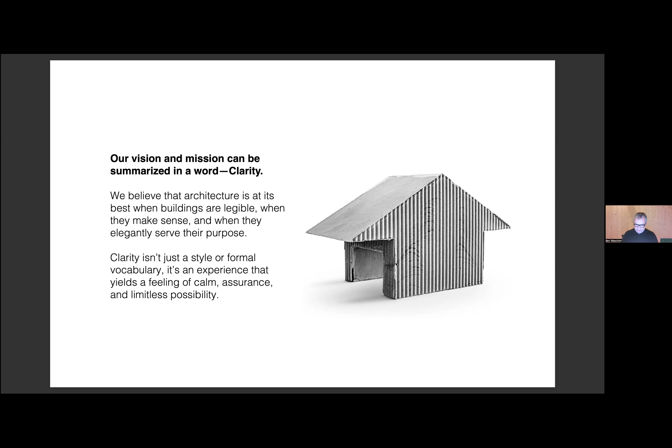And I think one way we like to describe it is an idea of clarity. And what we mean by clarity is it's essentially experiential legibility. And that legibility starts as a formal legibility, but then it's also compositional legibility, material palette legibility, systems legibility, and so on. I oftentimes start with these images, and I like these images because, to me at least, they represent formal legibility, and I like them also because it demonstrates how formal legibility can occur in all types of places.

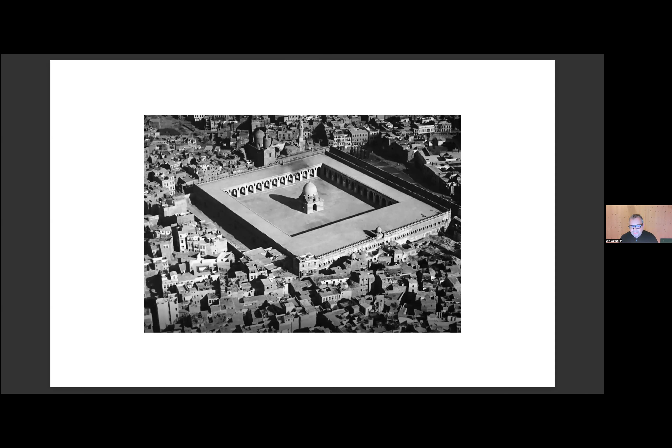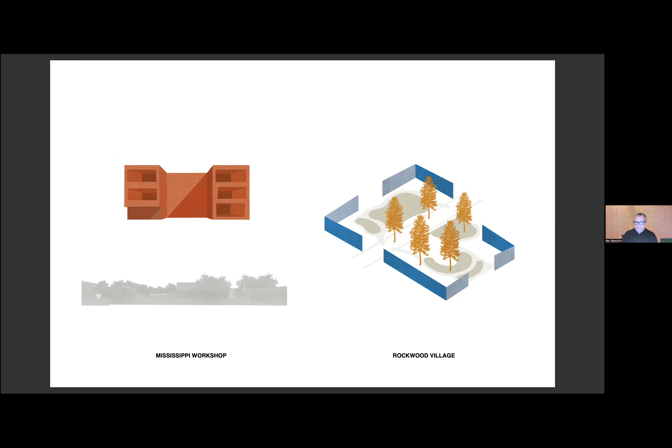And then with Rockwood Village, it follows this diagram where we're using the buildings themselves as really a secondary element within the project and treating the buildings as an edge to the park. So really giving priority to the park and the buildings as a quiet backdrop to the park.

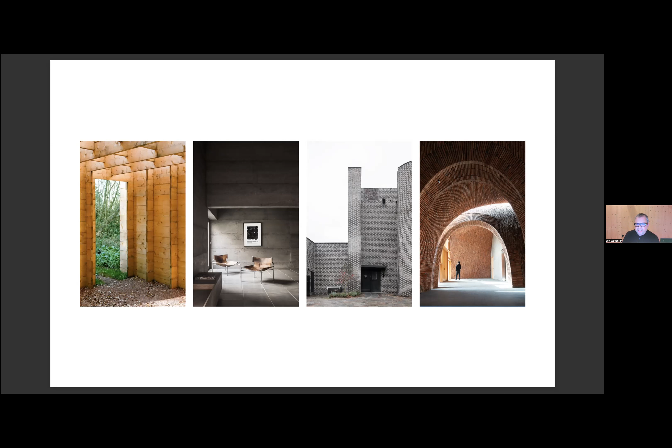So the Mississippi Workshop, as I mentioned, the idea actually didn't start with all mass timber. It was really an idea of trying to choose a material that we could use, if not in whole, a building that could be made primarily out of one material. And so, you know, it could have been brick, it could have been concrete, but because of where we are, because of the time in our world, and because of all of the new work that's been done around mass timber, we really leaned into using mass timber as this idea for one material.

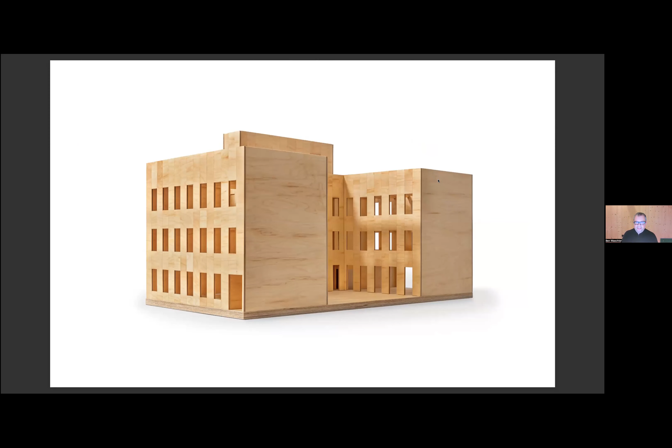This was a model we built before construction, after designing it, to really frame the project. And so this starts to show the components of the building. It's a 3-story building. It's a courtyard building, and the mass timber walls are constructed as a tilt up. So the walls go foundation to roof, about 45 feet, with beams, as you can see here in the model, second, and then floors third.

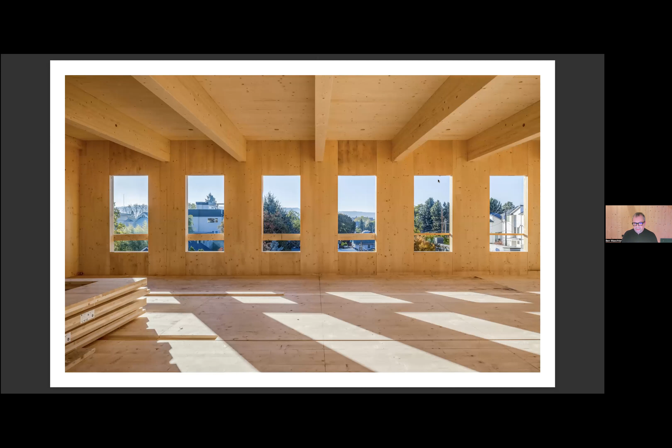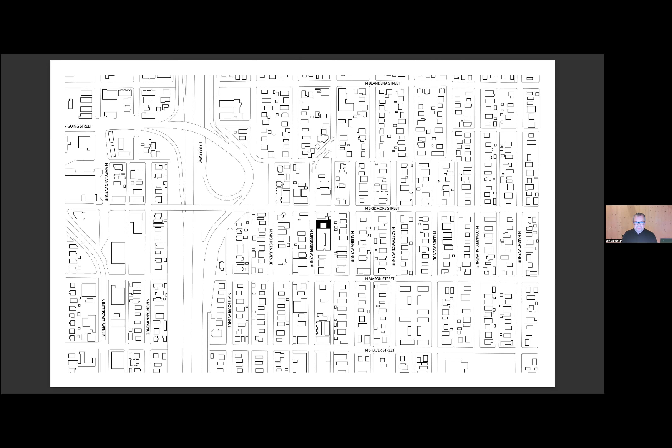Context: we call it the Mississippi Workshop because we're on Mississippi Avenue, which probably most of you know. We're at the north end, so Skidmore and Mississippi. It's a 50 by 100 lot. The architectural history of Mississippi Avenue is really made up of streetcar era buildings, whether wood or brick, buildings that oftentimes had retail on the ground floor and residential above, strong grid composition of the facades. Buildings were smaller scale, so 25 feet wide to 50 feet wide.

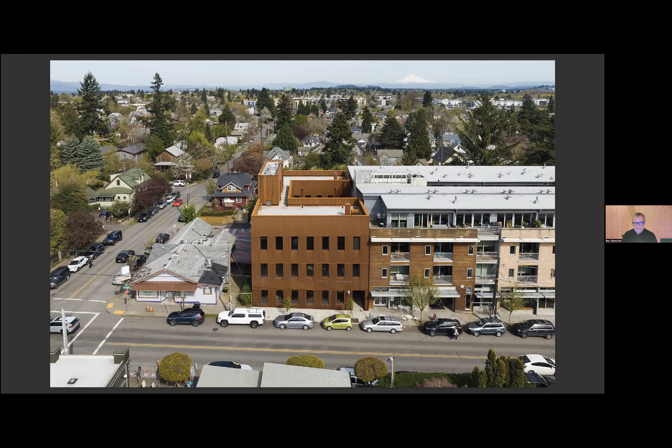Organization. Organization was sort of a counterpoint to this idea of building all out of mass timber, or all out of one material. Organization was really important in this building as a way of future-proofing it. Building all out of mass timber was great for creating constructional legibility and a strong sense of character and identity for the building and the interior rooms, but it's not easy to change over time. So we developed a strategy. We call it 6 rooms: 3 on the west side, 3 rooms on the east side, with a connecting courtyard in the middle. And the courtyard's really the first room, or the 7th room.

The idea with this strategy is that each of these rooms, they're larger rooms, about 30 feet wide by 50 feet long, are in some ways generic loft spaces, but they've all been outfitted with plumbing, mechanical and electrical to become either an office space, an apartment space, or on the ground floor, a commercial space. This is a conceptual diagram, the blue being residential, the orange being office, and the red being commercial.

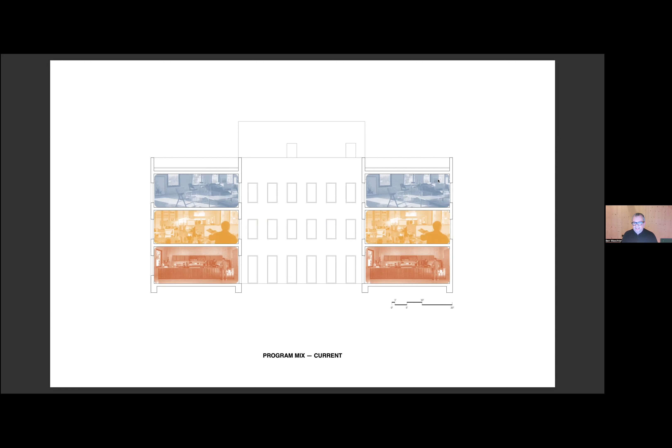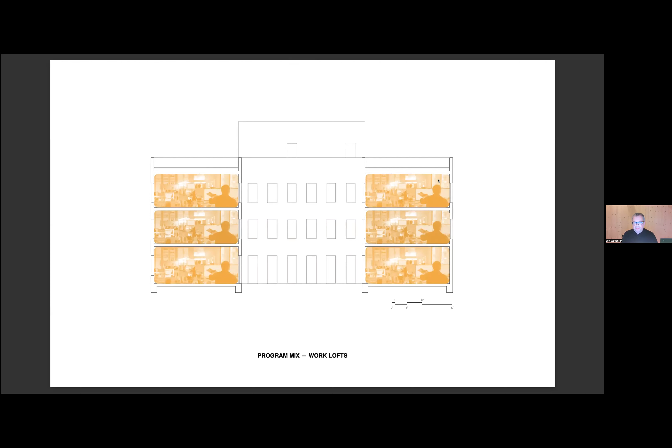This is the current organization of the building. I have an apartment on the 3rd floor, so residential. Our studio is on the 2nd floor, and then there's Capitola Coffee, a coffee shop, on the ground floor of the west side, and then we have our event space and model making shop on the east side of the courtyard. And this shows how it could be changed if needed over time, with minimal effort: all office, or all apartment and coffee shop, or all office on the west side and all apartments on the east side.

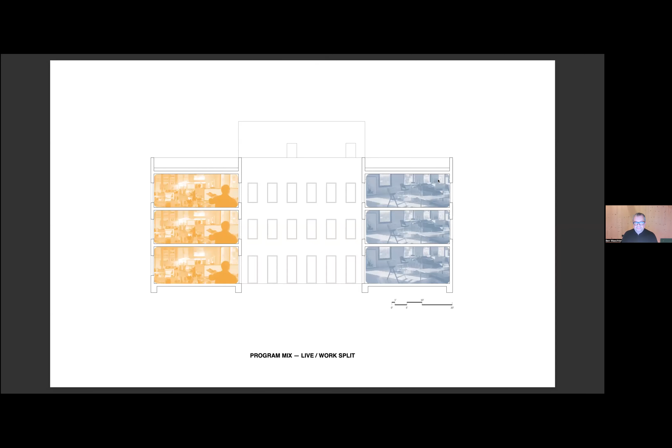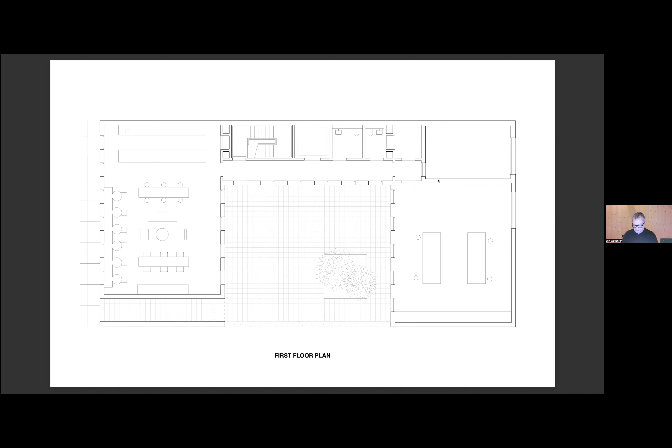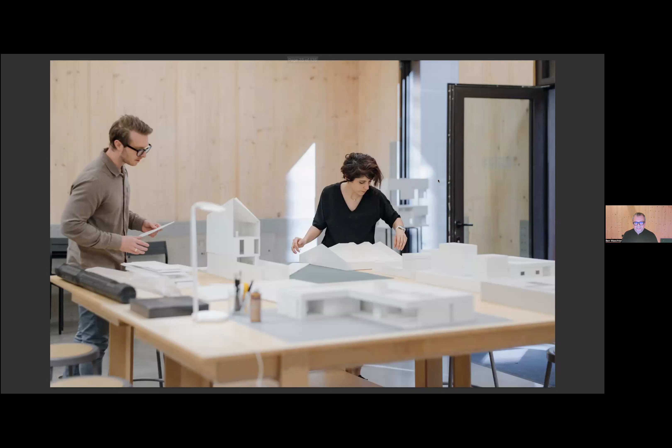Some more images of the courtyard with our model shop and workshop in the beyond. Model shop. And then this is the 2nd floor, our office space. On the east side, the right side, is our desks, and on the left side, the west side, is our meeting side and kitchenette. And then there's a connecting hallway that connects them, and off of that, the bathrooms, elevator, and stair.

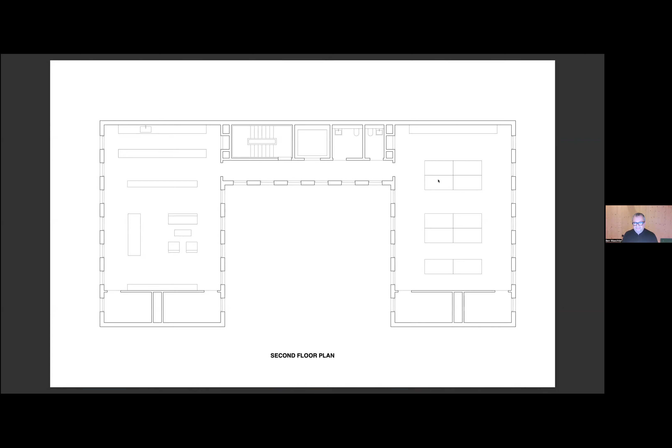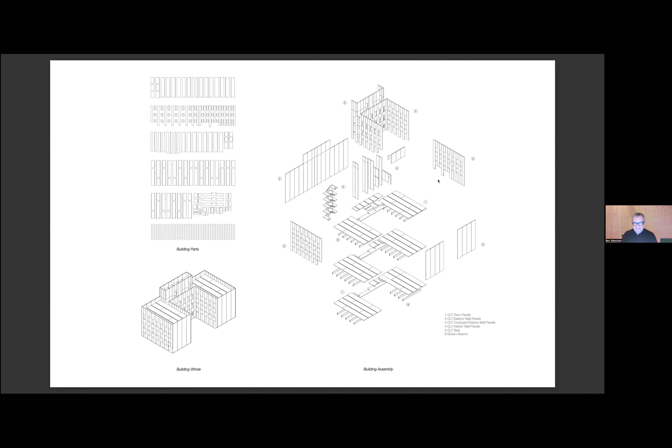Material systems. So this is a diagram of all the parts and pieces, the CLT components. On the lower left, you can see them all together, and the exploded axon is showing how it all goes together. We worked with KPFF as the engineers on the project, so they developed this system that I usually refer to as a tilt-up system. It was installed similar to a concrete tilt-up. So as I mentioned before, the panels go foundation to roof, the 45 feet. Narrow panels between windows, and then spandrel panels filling in.

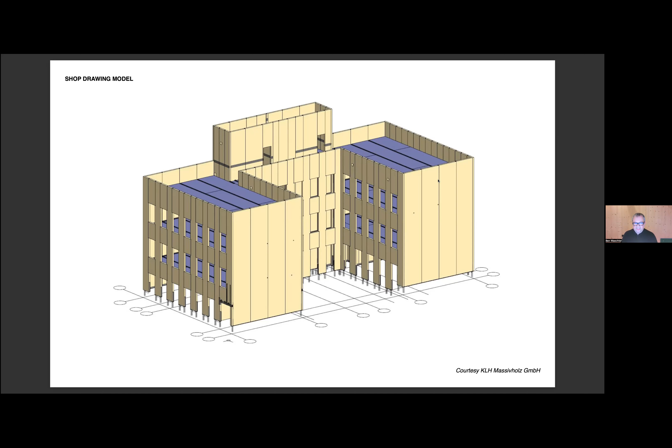Some shots of the glulam. So KLH was the manufacturer, and one reason we went with them is they were able to supply every component of the building. So the wall panels, the floor panels, but also the glulam beams. They also made the stair, which I'll show a little bit later.

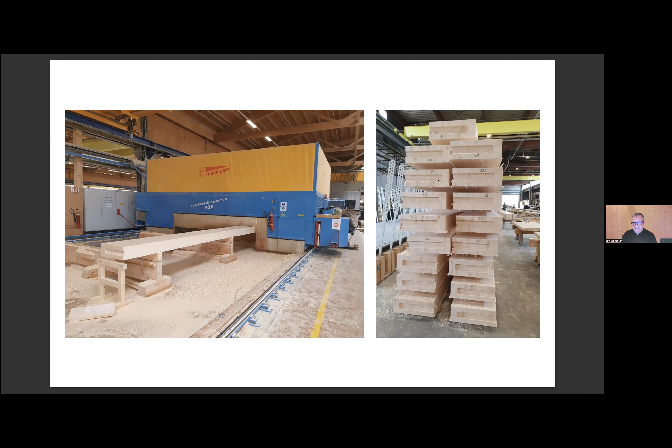And here you can see the beams being sanded, and then the ends, they're routed out, and the routed out part will be where the Ricon connector, the concealed steel connector, will go. And they were able to connect one half of the Ricon connector in the factory, and then sent the other half loose that we attached to the wall. CLT panel being fabricated and then shipping. Some construction photos.

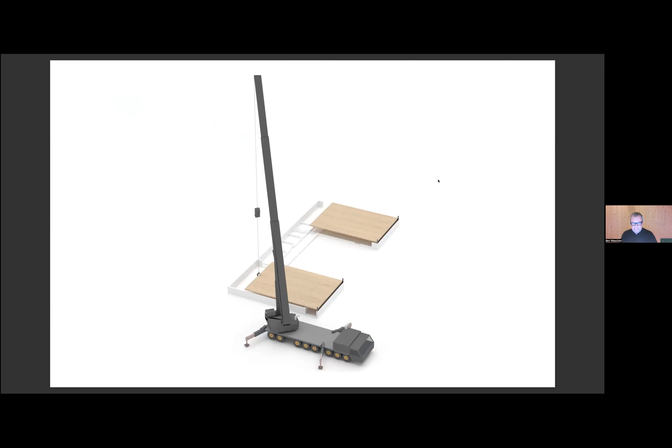This is basically a diagram showing the sequence of construction of the CLT component. So after the concrete foundation was completed, a mobile crane was brought. We had a mobile crane on site for 2 days, and the first day was lifting up the southern panels. The lot, it's a zero lot line situation, and on the south side is Mississippi Lofts that also is built on the lot line. So building the south walls was the trickiest part.

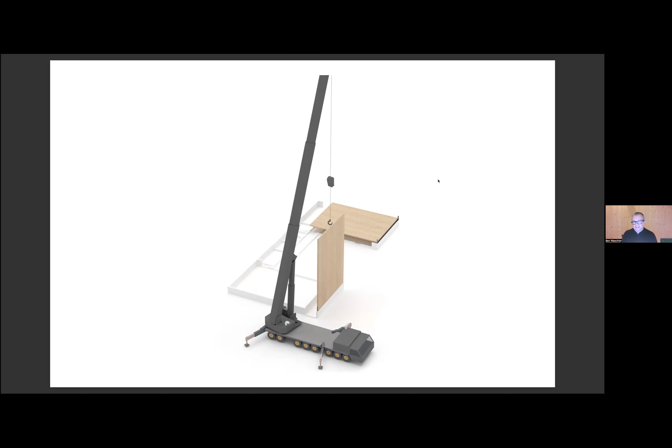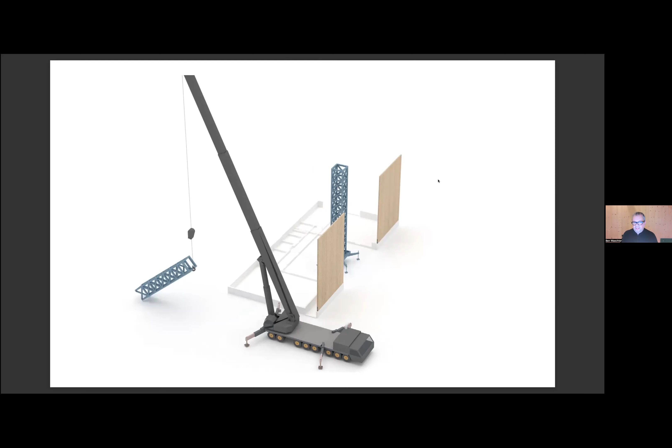So we basically had the wall. There's 4 wall panels that are each about 7 feet wide by 45 feet tall that were laid down and stitched together on the ground. We waterproofed it, insulated it, and put the metal cladding on it prior to tilting them up. And then this mobile crane tilted them up. After that, the mobile crane installed a sort of smaller tower crane in the courtyard. And we used the tower crane then to install all the other CLT components.

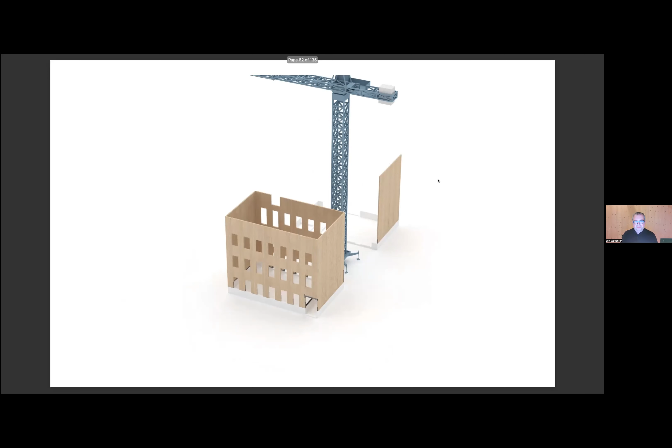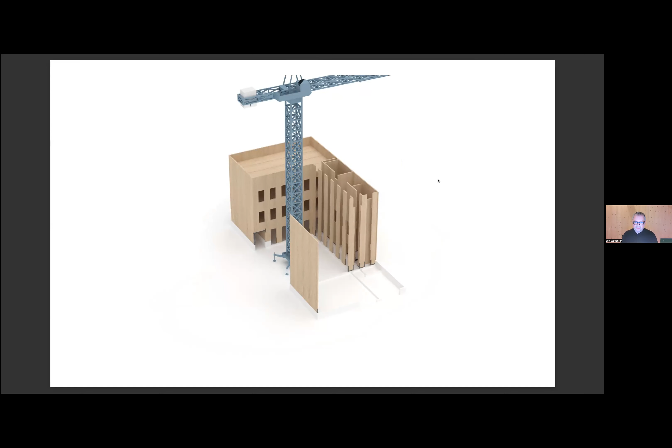So this is showing the more slender CLT panels between the windows, and those are about 3.5 feet wide by that 45 feet tall length. Spandrel panels went in next with a half lap connection. Then beams and floors were lowered into place. And then that was the west side that was completed first. Then the connector and hallway, elevator shaft, stair, that was done second. And then the east side was done third. And then the mobile crane came back and took away that tower crane.

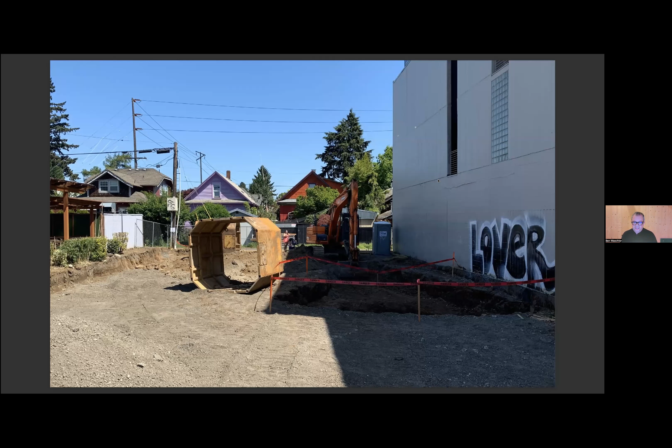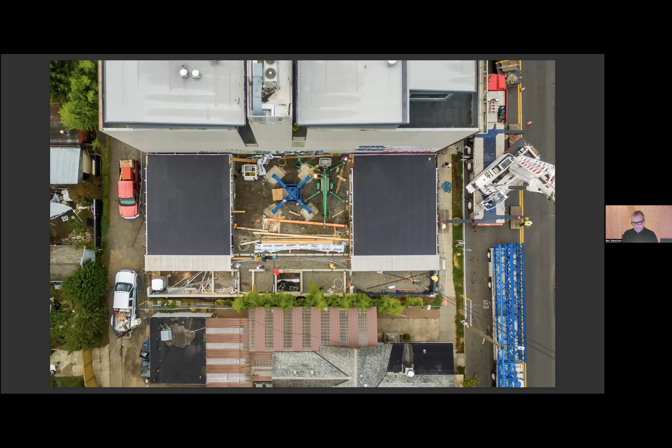This is an early view of the site. So you can see Mississippi Lofts on the right-hand side, the lot line that we built up against. There's an alley towards the east, towards the back of the property. Here's an aerial view showing those panels I was describing being stitched together, and then waterproofed, insulated, and clad with metal prior to being tilted up. You can see the mobile crane parked on the street to the right, tilting up the panels, and then jumping ahead, the tower crane's installed, and you can see how the panels are coming together on the west side.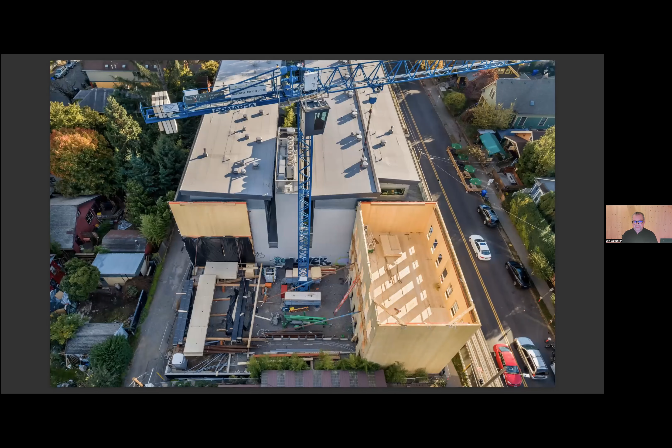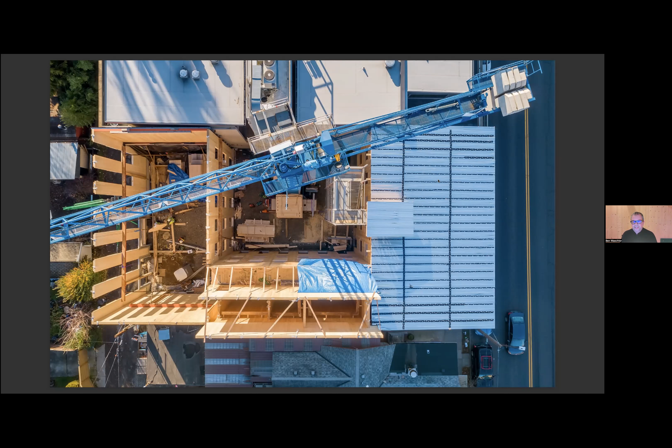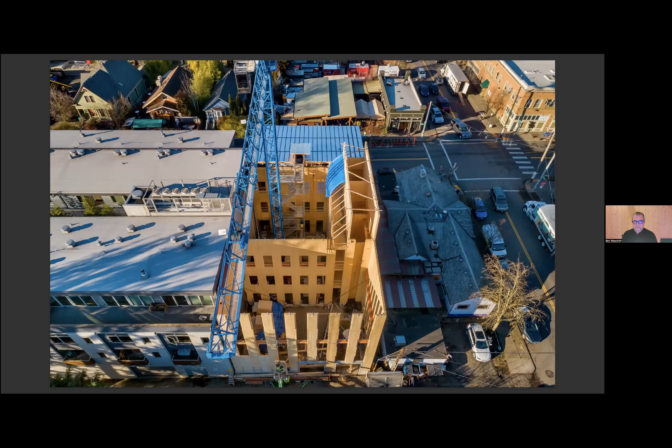Then starting to install the connector piece. Weather was an issue for us. The CLT portion did go up in the fall and part of the winter, unfortunately. And so we constructed this temporary roof, you can see it on the right-hand side, so that we could install the permanent roof underneath. Once that roof was done, then we moved the temporary roof to the east side. Systems integration.

So our strategy for systems integration was to basically create poche spaces or smaller rooms and vertical chases that could connect systems vertically in the building. So the gray portions that are shown here in this generic plan are where that happens. And so we're using the south side, the side that adjoins Mississippi Lofts, the south side of each room for that. So that's where we're pulling fresh air in from the roof.

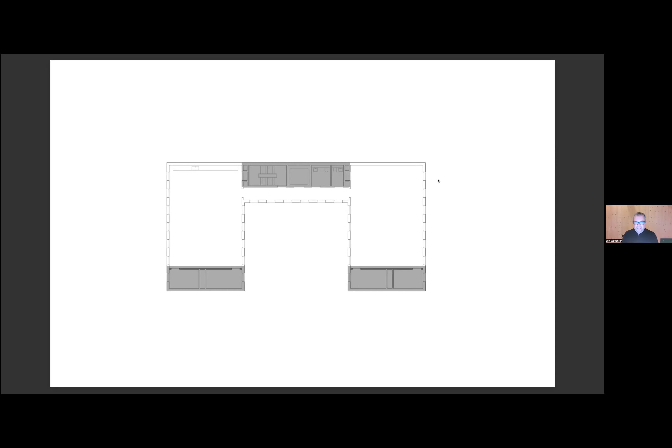We have hydronic lines running up and down. We have electrical and data. The connector bar where the stair and elevator are, we have a vertical chase there doing the same thing. These are some diagrams of how we're running the system. So the hydronic system, there's a diagram on the left.

So it's showing heat pumps that you saw from the photo earlier on the roof, sending either heated or cooled water to holding tanks in the mechanical room, and then from there pumping it to the slabs in each of the 6 rooms. And then the middle image shows using the poche space in a similar way, but this is for ventilation, so bringing fresh air in on the south side and then exhausting the air on the north side where the hallway connector piece is.

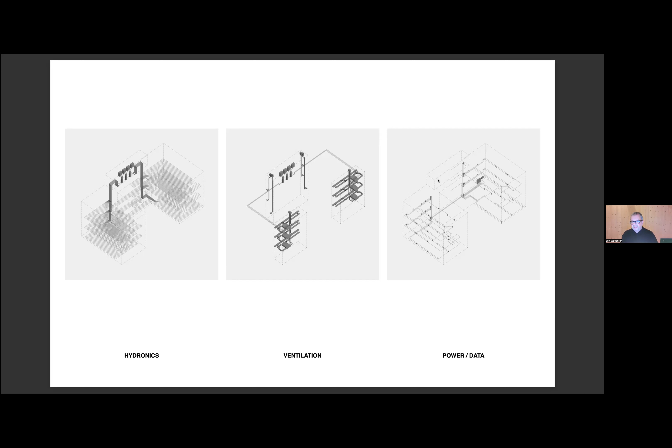And then the diagram on the right-hand side is power and data. In our case, we decided to run all hydronic systems, all power and data within a 4-inch topping slab. So using the topping slab as a thermal mass for heating and cooling, but also using that thickness to run conduit for power and data.

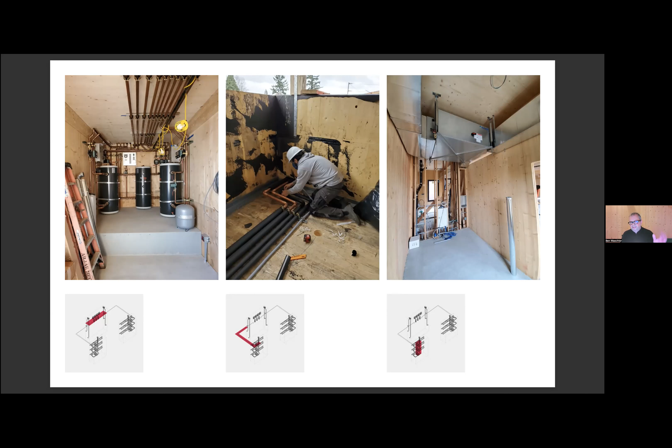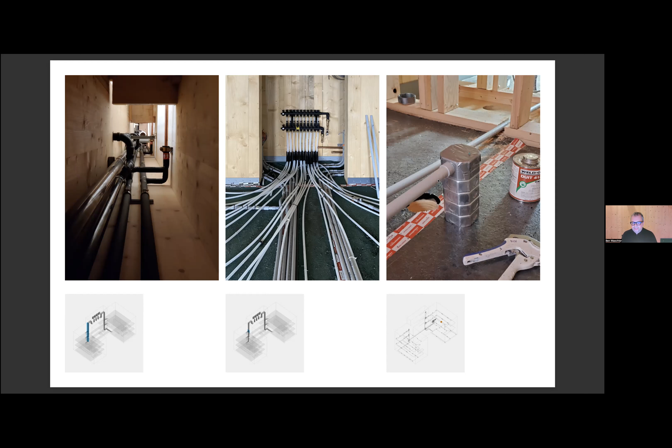This is showing some of the shaft spaces before they were closed up on the left-hand side, running radiant hydronic, and you can see kind of the cobweb of hydronic tubes and conduit. But the idea is from this room, you can pull power and data through this conduit, so it can be redone later. This is also where you access the manifold and electrical panel. And then on the right, that's just showing power and data. Here's some of the radiant tubes and power data.

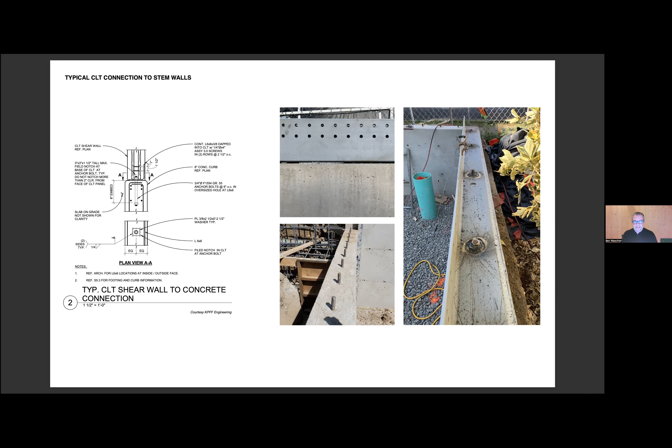Construction details. I'll go through just a series of construction details. This is a detail showing how we connected the long CLT wall panels to the foundation. So we used the 6x6 steel angle. We first basically connected it to the concrete with threaded rod and nuts, and then we lifted the CLT panel onto that, and then the CLT panel was screwed. You can see holes in the 6x6 angle. The CLT panel was basically attached to the angle with all those screw holes.

On the right-hand side, you can see we used a rubber gasket, also from Rothoblaas, that created a seal and also just a moisture barrier between the steel and the wood.

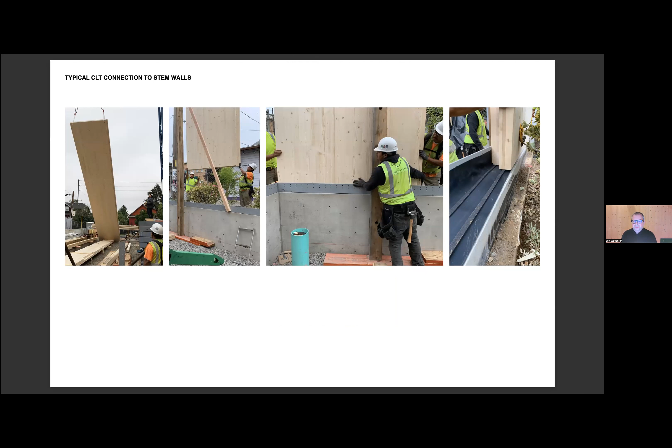On the shorter walls, the walls between the windows that are about 3.5 feet wide, those are more robust shear panels with hold downs because of the narrowness. And so our hold downs basically took the form of these U-shapes, using the same 6x6 angle, but in the form of a U. So the bottom portion connecting it to the foundation, and then the two sides acting as hold downs.

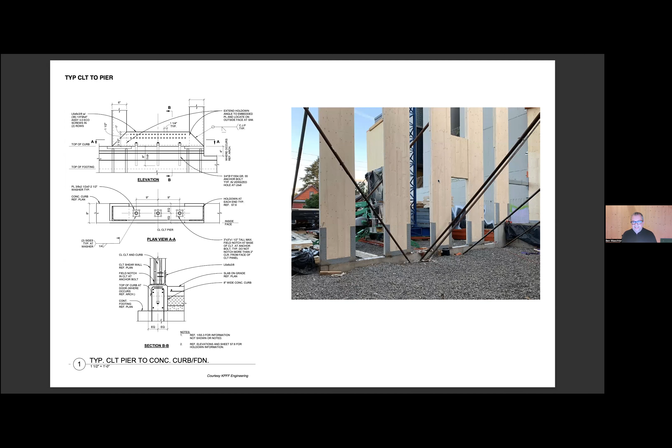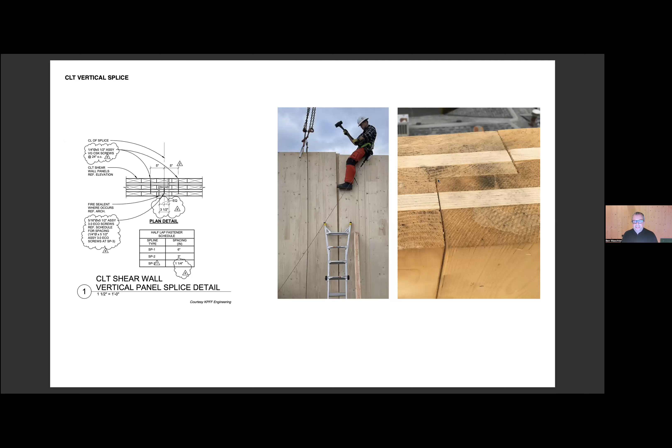Some installation photos. So we used a half lap everywhere really. And so this shows how that half lap worked, the picture on the right. It's screwed together. For the exterior walls, the screws are all on the outside, so they're all concealed by the waterproofing and insulation and metal cladding. So on the inside you don't see any screws.

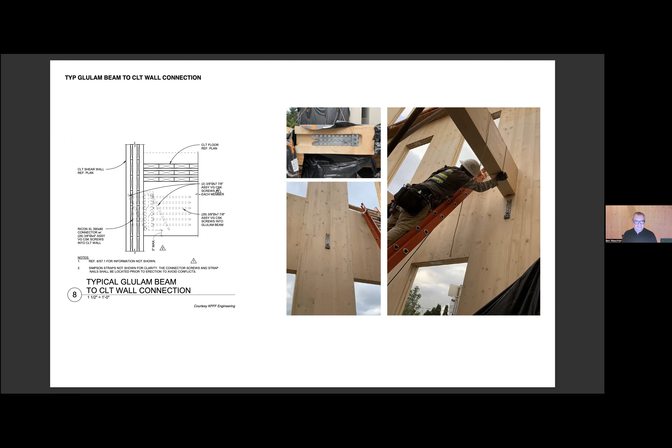Here's a view of just bringing these beams in. I guess a small interesting thing for those who are interested, or small detail, is I was always concerned with the tight tolerances with a 3-story building, how we would lower the beams into this tight box and also the floor panels in this tight box. And the technique that the heavy timber installers used was basically taking the steel braces, and you can see the steel braces in this picture, similar to what you would see in a concrete tilt-up, and you can rotate the brace and slightly open up the walls or slightly close down the walls.

And so when they're lifting the beams down or the floor panels down, they would slightly open up the wall, and then right when the beam's setting in, they would close it. And that was a simple but effective technique.

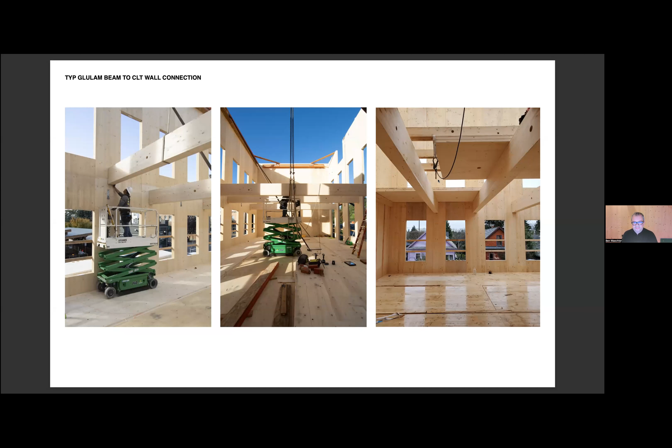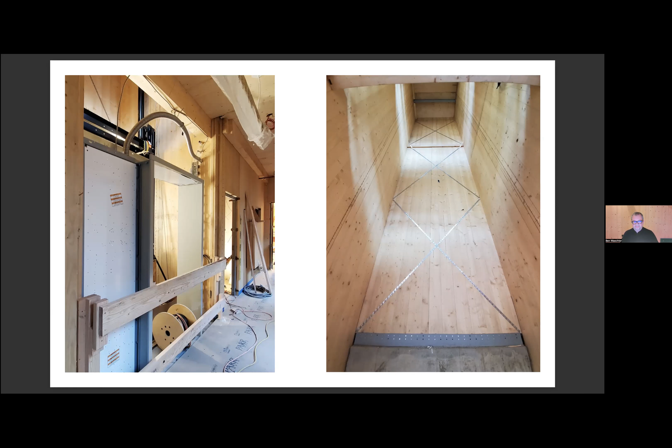The picture on the left. And this was done well after the crane or any sort of heavy lifting equipment was gone. And so we had big CLT panels laying around the job site that eventually had to go in. I don't have any pictures of it, but we ended up using a lot of strong people, and then also hoists, and so they were sort of hoisted into position.

I'll also mention with the stair, we held it off 3 inches from the volume or the shaft of the stair room, and we did that for building tolerances, but also aesthetics and also for seismic. And so the stair is really meant to, in a seismic event, be grouped together as one thing.

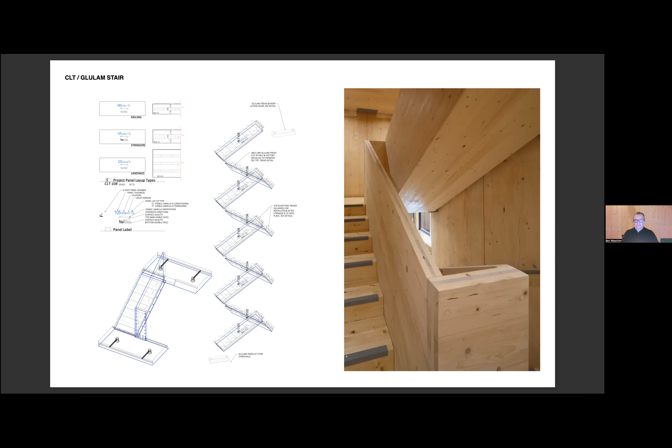So it's structurally one thing, and it sits on those steel angles that you see in the picture on the right. It sits on them in a way that they can slide. So in a seismic event, they have some room to slide back and forth and not break itself apart.

Last year, or maybe a little more than that, we received a Wood Innovation Grant from the U.S. Forest Service. It's a grant that's typically awarded to trying to get timber projects off the ground, research and pre-construction development type things. We received it as a post-occupancy grant, and so the idea was to basically do 2 parts. The first part being a documentation of what we did, and these are some of the details. It's in progress, but these are some of the details that we're doing to document the current building.

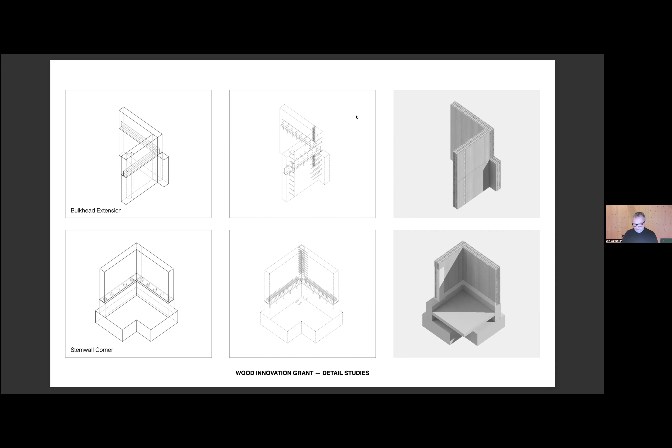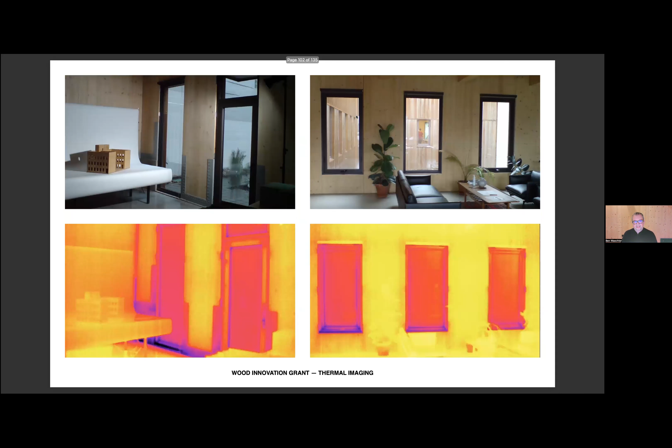We're also working with the University of Oregon, Mark Fretz and his group there, doing testing on the building. So we've done acoustic testing on the building. We've also done thermal testing, thermal imaging, looking at how well the half lap seals work, how much energy transfer there is through that at the corners, from floor to floor, that type of thing. Some more images of that.

And then also air quality testing, so testing for formaldehydes. Fortunately, we tested 0 for formaldehydes, but also CO2 quality.

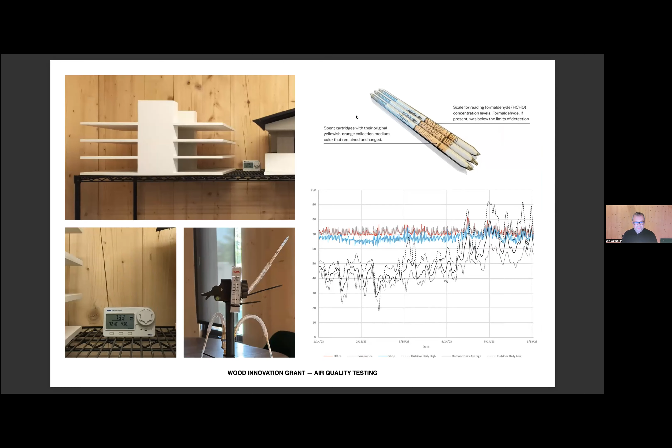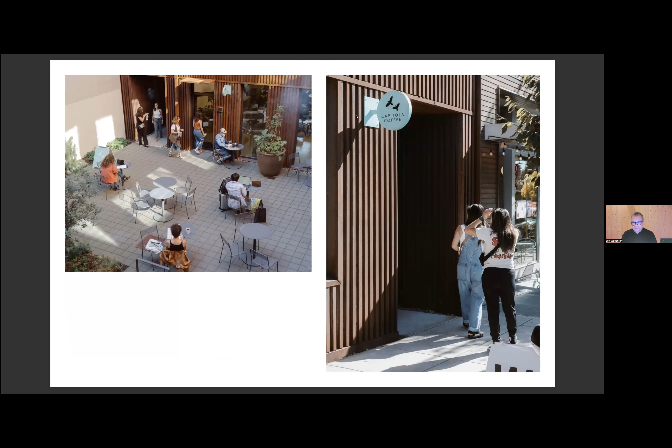And then just a few images of life of the building before I move on to Rockwood Village. Courtyard on the left, you can see the passageway that you go through. A couple people skeptical about if they should enter. Coffee shop image, the workshop.

We're also trying to host as many events in the courtyard. So really, the courtyard is meant to be a space for the coffee shop to use and for us to use, but it's also kind of an invitation to the neighborhood and really the city.

And this is a performance. Third Angle hosted this performance in the space. We've also had Wildcraft, who organize crafting workshops and classes. They use the courtyard.

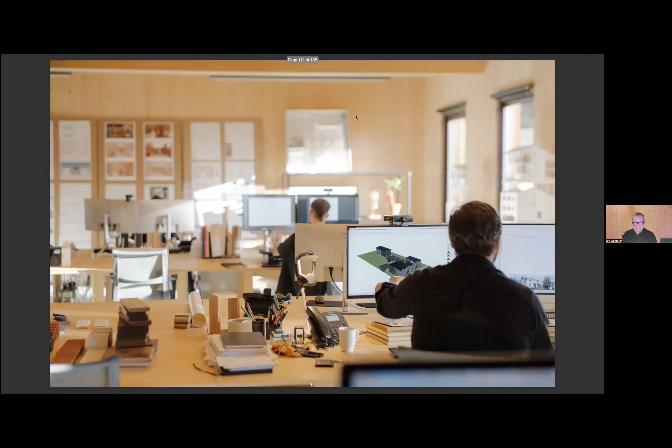They've been using it in the courtyard this past year, and they'll be using it a lot more in the coming year, the workshop as well. We've hosted events. This was a timber talk we did, and then just some other images.

Okay. Ben, real quick. There are a couple questions. Do you want to answer them now or wait until the end? Yeah, if it's okay with everybody, let's wait till the end. And I have not nearly as many images for Rockwood, so don't get concerned, everybody.

Let's see here. So Rockwood. Again, it's a different idea, but our starting point was the same as far as coming up with a strong organizational idea. The organizational idea or experiential legibility idea for Mississippi was the 6 rooms with the courtyard and then building out of one material. The idea with Rockwood is, how can we create multifamily dwellings in a way that also maintains a lot of outdoor space.

And so what we did with this project was really starting with the idea of a park. The idea with that was sort of twofold, or maybe threefold, not to get too deep in the weeds on this. The developers were CDP, Community Development Partners, and Hacienda CDC. They were interested in this site. It was a site that had an open space overlay designation, so it didn't allow for any housing.

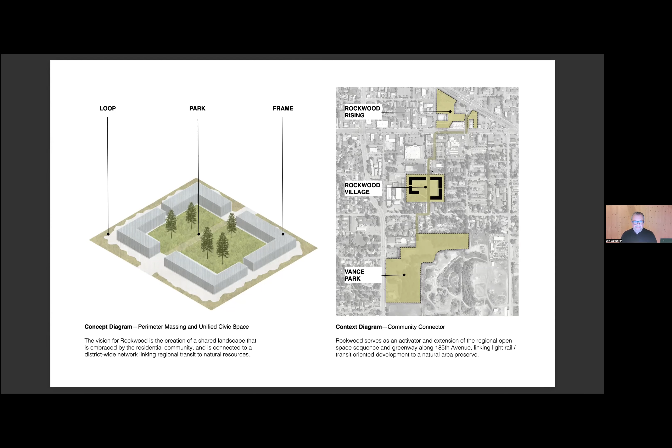Vance Park, which is a natural park to the south, and the new Rockwood Rising development, which is more of a mixed use, plaza, transit hub development. So by doing this publicly accessible outdoor space in the middle, we were able to link them all together and help the neighborhood. We worked with Place Landscape Architects, who developed the site plan. This is an aerial view showing the perimeter buildings. We have a community building in the center, with offices, but also a community kitchen and community space.

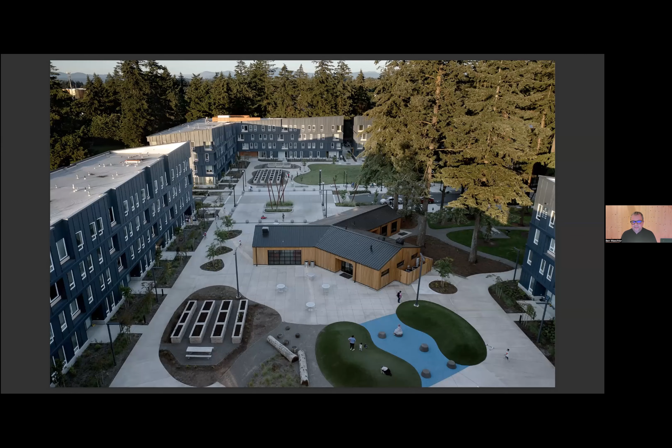This is showing the south entrance on the right, and the north entrance to the left. And that's showing the 185th street, which did not exist before. So that's how we got into the site. And then just some images of a drop-off area and the plaza beyond. Some other images of the building.

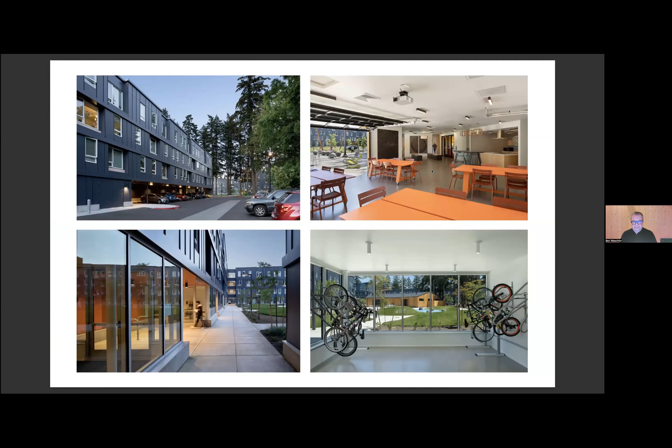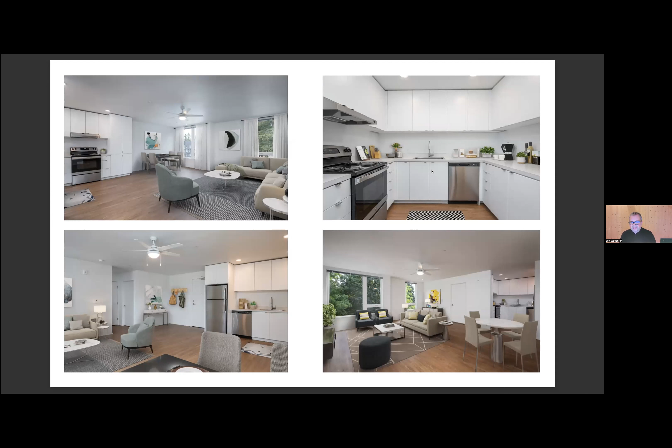It's geared for families, so it's a mixture from 1 bedrooms to 4 bedrooms, and this shows that mix. The left view is a 1 bedroom version where the kitchen is part of the living, dining, kitchen. The right hand side shows a three bedroom where the kitchen is tucked to the side. And then just some more views of the exterior.

One thing that the planners at Gresham, one of their big concerns was just articulation and having these big, long, basically uninterrupted facades for building lengths. And, of course, we wanted to do that to make the park as big as possible. But it was a concern. And so

one strategy, aside from the recessed windows, was to develop this vertical batten system. It's a cost-effective wall assembly, but we wanted to have shadow relief and texture, and so it's a Hardie panel for the cladding, but then we're using a metal vertical batten that comes out about 4 inches, and so that creates shadow relief. And then at every floor level, we have a metal kind of skirt,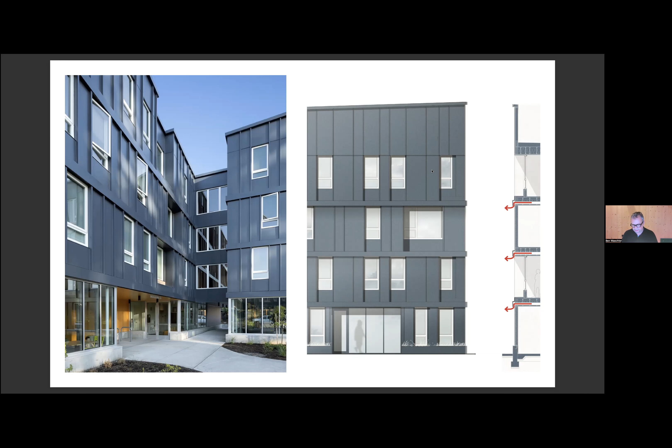and the skirt and the batten work together to create shadow relief and texture, but the skirt also allowed us to put conventional vents behind it. So bathroom vents, kitchen hood vents, all of that stuff exits the building in a concealed way behind the skirt. So instead of doing the more expensive venting through the roof and wanting to avoid ugly vents on the wall, this is sort of our strategy for it. And also to create the shadow relief and texture that these long facades really needed.

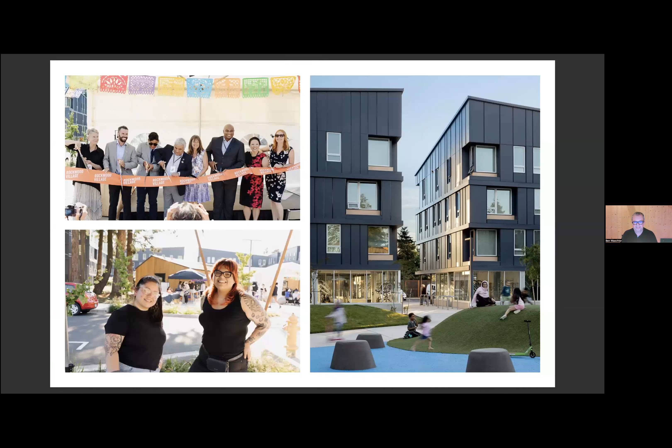Some more views. An evening view. We were able to maintain a great stand of these old fir trees, so we incorporated that into the park, as part of the park. Just some opening day images. And that's it.